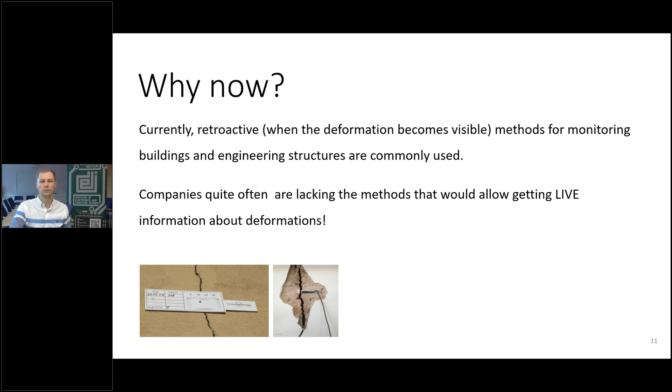So without further ado, I'm going to give the floor to Richard. He will continue speaking and give you the technology overview. Then I will be back with the summary and Q&A session.

Yeah, Richard, we're gonna switch seats.

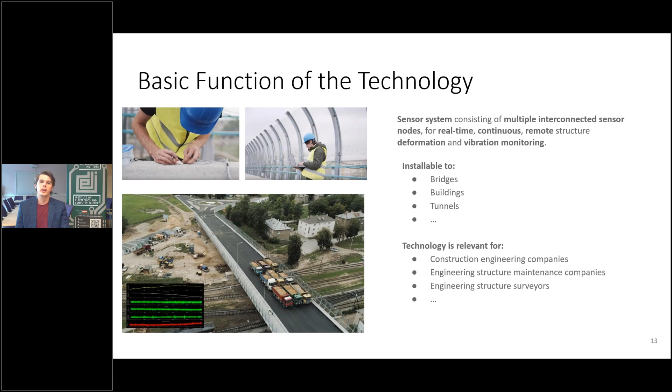This allows to take proactive steps if significant deformations are detected, thus reducing risk of significant damage or degradation of the structure or even collapse, thus saving a lot of money. This kind of technology is installable to engineering structures such as bridges, buildings, and tunnels. And this kind of technology is relevant for construction engineering companies, engineering structure maintenance companies, or engineering structure surveyors.

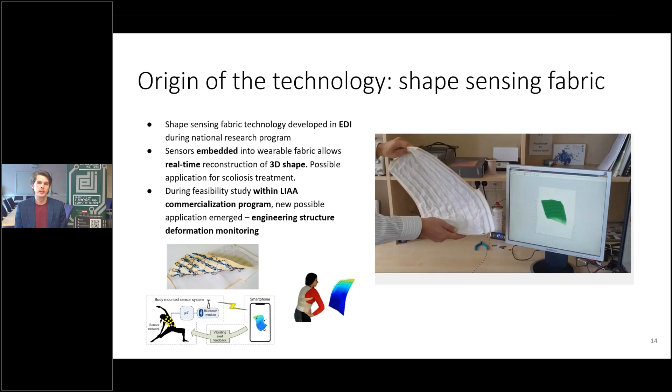The origin of the technology is the first developments were done during a national research program, where we developed technology that we call 3D shape sensing fabric. It consisted of sensor nodes that are embedded into wearable fabric and that allowed, by using sophisticated data processing algorithms, to reconstruct the shape of this fabric.

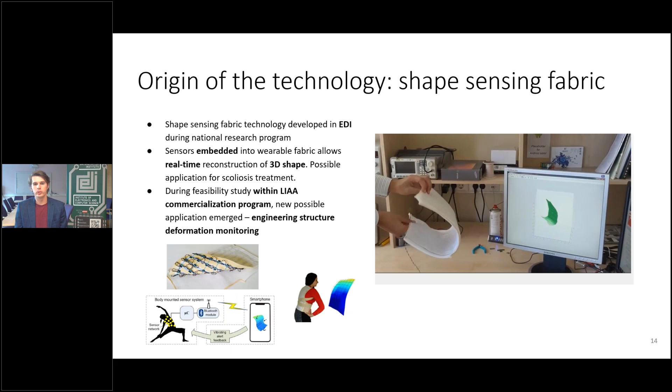This technology was developed for scoliosis treatment applications, where we developed a prototype wearable shirt consisting of this fabric, and by sending the sensor data to the smartphone, we could detect deviations from healthy posture, and if serious deviations were detected, a sound or vibrational feedback was given to the user, so the patient could be reminded to take a healthy posture.

Using this technology, we applied for funding within the Latvian Investment and Development Agency commercialization program, and were successful in getting this funding. During this program, the first 6 months were intended for feasibility studies and commercialization strategy development. And during these first 6 months, we identified a new interesting application area, which is engineering structure deformation monitoring. And we thought that our technology could bring value to this area.

Because medical devices require very intensive and long clinical trials, that wasn't feasible for the duration of this kind of project, so we decided to adapt our technology for this new area.

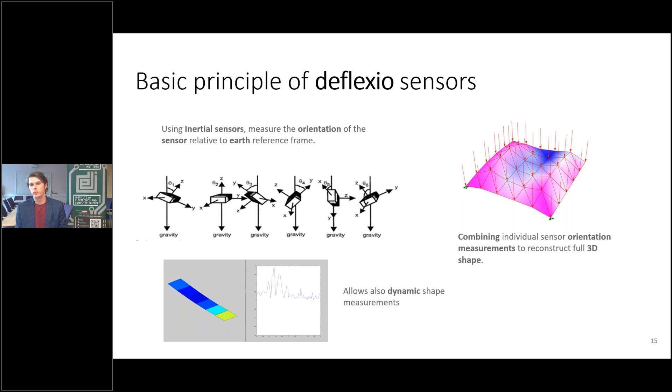By attaching these sensors to various parts of the object or structure, and by combining sensor data using sophisticated algorithms, it is possible to reconstruct the full three-dimensional shape of the structure. By measuring in various time intervals, it is possible to monitor how the structure changes over time, or dynamic measurements.

This kind of structure allows measurement of acceleration in a single direction, but combining these structures in three perpendicular directions, it is possible to reconstruct full acceleration in three-dimensional space. This kind of structure is integratable in integrated circuits using MEMS technology, and there are commercially available sensor chips that are relatively low cost and low power consumption, and are mostly used nowadays in mobile phones to detect the orientation of the phone to adjust the screen orientation. Particularly, we're using the commercially available Bosch BMA 456 sensor that provides low temperature drift.

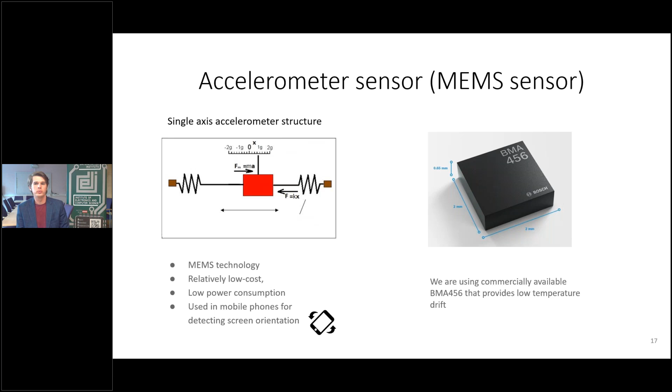To realize this kind of approach in real life, there are two main challenges. The first challenge is how to connect a lot of sensor nodes in one system to gather the data from these sensor nodes to achieve high accuracy and provide complex measurement of objects with complex shapes. The second challenge is how to process this accelerometer sensor data to get meaningful information that would provide us with deformation information. To overcome these challenges, we have developed two novelties. The first novelty involves a novel IT architecture for sensor node data acquisition that involves architecture, hardware, and software development. And the second innovation is data processing algorithms for shape reconstruction.

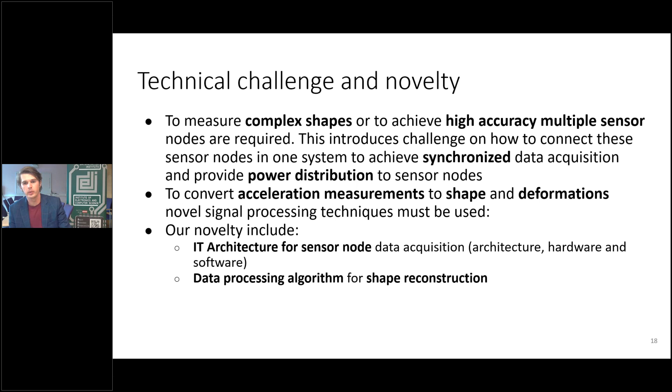For connecting multiple sensor nodes, we have developed an energy efficient sensor communication solution that provides wired sensor connection with a minimum number of wired connections. Between each sensor pair, only 4 connections are required, 2 for power transmission and 2 for data communication.

We chose to develop a wired sensor communication solution because wireless transmission is less energy efficient, and also each sensor node would require some power source, for example, a battery, which would need replacement, which is inconvenient for maintenance reasons. And our developed solution allows connection of several hundred sensor nodes and provides synchronized data acquisition.

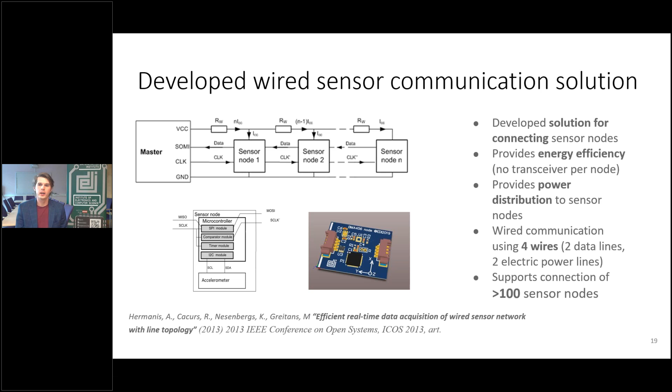Sensor data can be accessed locally through Bluetooth connection or through local area network. This data can be sent directly to a monitoring computer. Also, data can be sent remotely using internet connection, either through Ethernet, Wi-Fi, or mobile network, where data can be sent to a central server, and data can be accessed from anywhere in the world from a regular desktop computer.

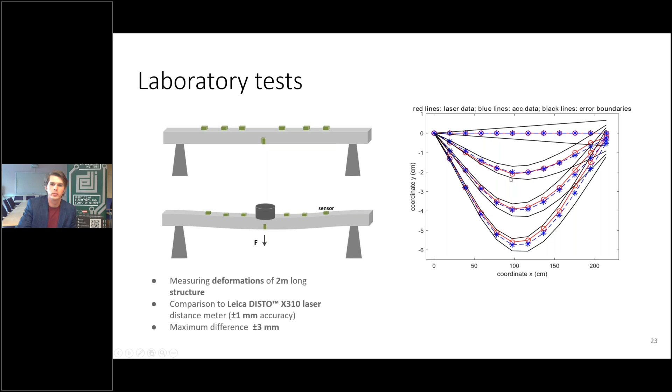So for accuracy tests, we attached our sensors on the 2 meter long structure, and by applying various weight loads on this structure, we measured various corresponding deformations. As ground truth data, we used a Leica distance laser meter, and from the test we obtained that the maximum difference from the ground truth data was approximately less than 3 millimeters.

To test our system's ability to work in changing temperature conditions, we performed tests with 3 different manufacturers' sensors, such as ST, Bosch, and Freescale. The temperature range tested was from -5 to 25 degrees Celsius. And during tests, we identified that the sensor nodes from Bosch had the least amount of variance, achieving less than 5 micro g values variance.

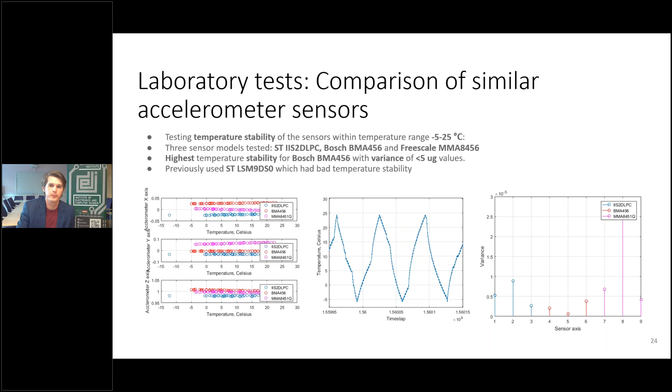Previously, we were using sensors that were without any temperature compensation, and the stability was more than 100 times worse. So during these tests, we found a very good solution for temperature stability.

Also, various use cases require that sensors can work in very humid environments. We have experimented with various prototypes of casings to protect the electronics of the sensor nodes. The first tests were done with 3D printed casings, but we concluded that 3D printed material has small pores that provide very bad insulation from a humid environment.

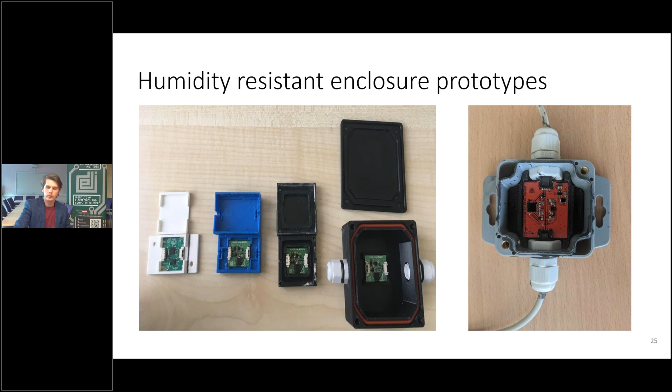So we also tested some existing casings from molded plastics, and they were very good, showed very good resistance to humidity.

The temperature and humidity tests were performed in a climate chamber that's available in our premises. The interesting fact is that this equipment is used by another team for testing equipment for space-related applications. For example, they have developed a unique technology for very precise timing measurements, providing 1 picosecond accuracy. This technology is used for satellite ranging, and it's very important to test their equipment in very extreme environment conditions.

As I mentioned before, we have also performed field tests to test the ability to work in real conditions. The first field test was done in the Spice shopping center. Spice shopping center is located in Riga, and one interesting feature is that they have a very large area of flat rooftop, which is problematic in winter time when there is a lot of snow. To ensure that the structure is safe, the snow must be cleaned from the rooftops, which is very expensive. So they are interested in a system that could monitor the snow loads.

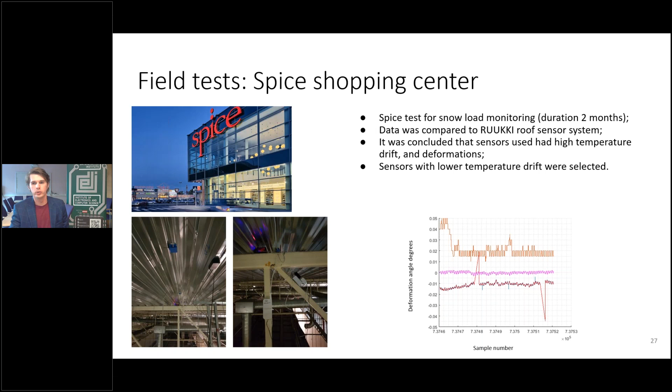One of the main takeaways from these tests was that our system is quite easily installable. It took us about a few hours to install our technology, while the professional company with conventional methods took a full day to set up their equipment.

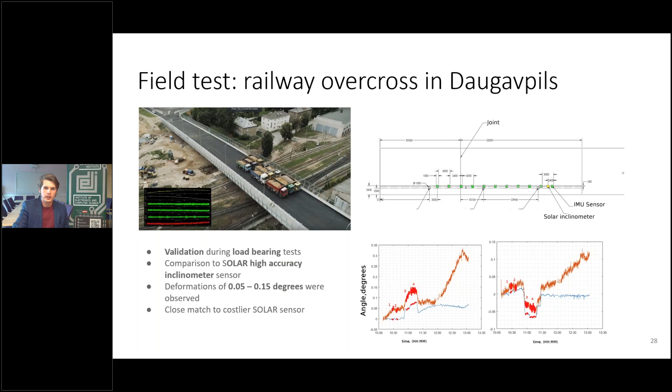The third field test was done on the spectator stands in Biķernieki racing track during the World Rallycross event this year. The maintainer of this racing track was concerned about the state of these old, nearly 60 years old spectator stands, and we decided to install our sensor system to measure if there are any deformations during racing events when the stands are filled with spectators.

During these tests, we didn't measure any significant deformations, but the main takeaway was that the system withstood very harsh environment conditions. During 1.5 weeks, there was quite bad weather with a lot of wind and heavy rain, and our system worked fine without any data interruptions, and the data could be remotely sent to our institute, where the data acquisition server was installed.

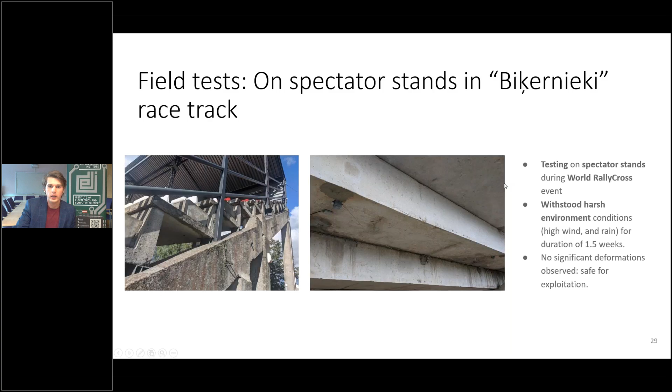That's it about the technology. As I mentioned before, this technology is developed in the Institute of Electronics and Computer Science with the help of our team. The team mainly consists of hardware and software engineers, as well as a digital signal processing algorithm expert, and to drive the commercialization, we also have several people with experience in the area of commercialization.

I would like to thank you for your attention. This concludes my introduction to the technical part of this technology, and I want to give the word back to Eric to conclude this presentation and inform about next steps, and I will be back for the Q&A session as well. So yeah, Eric, the floor is yours.

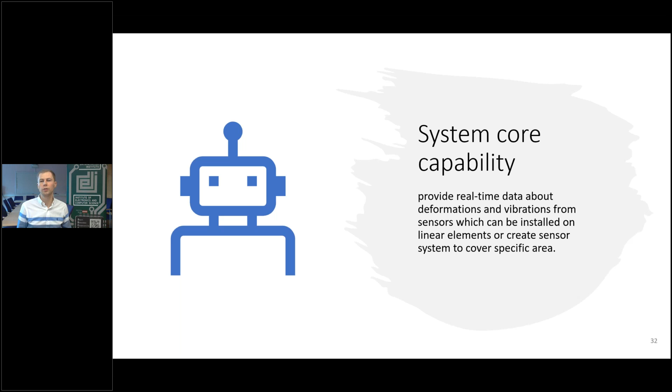And our competitive advantage actually consists of four main elements. The first element, the most critical, is the shape descriptive algorithm, which we have custom developed and which enables us to interpret data from different types of sensors, enabling the system to be affordable and scalable. We have developed a specific IT system architecture to support this technology so that it would work in practice. Our sensor communication solution is unique because it allows connecting several hundred sensors compared to other systems, which typically connect one or two sensors. And in addition, we have developed custom hardware-based software to control sensors, so not only conventional, but also at the hardware level.

We have identified many different use cases. You saw from Richard's presentation, we use it on bridges, on rooftops, and on the spectator structure. But there are many other applications where we can use this software. We have divided them into two main segments, and of course a third segment, other use cases, which is limited only by your imagination.